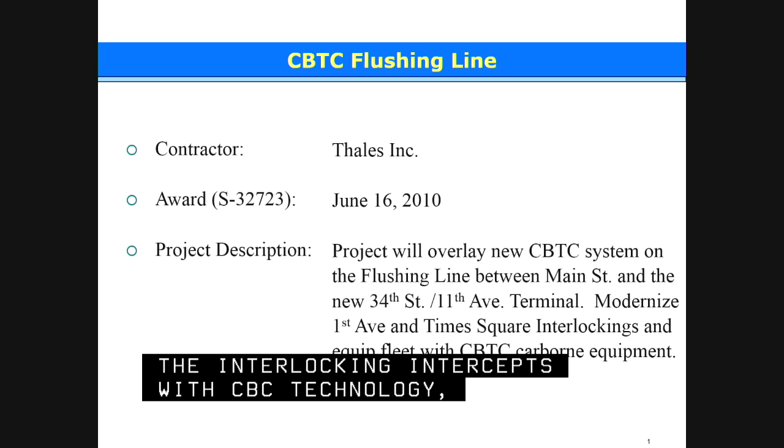The project modernized Times Square and First Avenue interlocking, modified all other interlocking to accept CBTC technology, and also installed CBTC equipment on 46 trains supplied under a separate contract with Kawasaki.

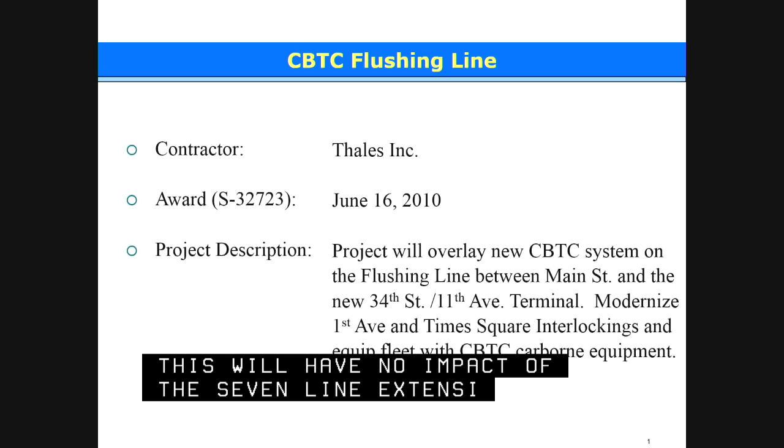This contract activity has no impact on the opening of the 7-line extension. We have also completed all the installation activity between 42nd and 34th Street to avoid any need of track outage immediately after the opening of the extension.

The project is scheduled to achieve substantial completion by the second quarter of 2017, same as I reported last time.

On the project cost, we are tracking trending cost implications associated with the revised service plan supporting the CBTC Flushing project. Service diversion costs have been trending higher due to the combination of ridership adjustment, which added Q trains and additional buses, as well as added support costs for projects allowed to piggyback the outage. We are analyzing the recent costs incurred and will report the budget impact on the next update.

Since my last update, good progress has been made. We have placed the First Avenue and the Hunter's Point interlocking in service, and we also started the CBTC functional testing.

Over the next 6 months, we will continue to install CBTC equipment on Kawasaki-supplied modified cars. These installation activities are done in-house by the Department of Car Equipment, and I'd like to take this opportunity to thank them for doing it very effectively and efficiently.

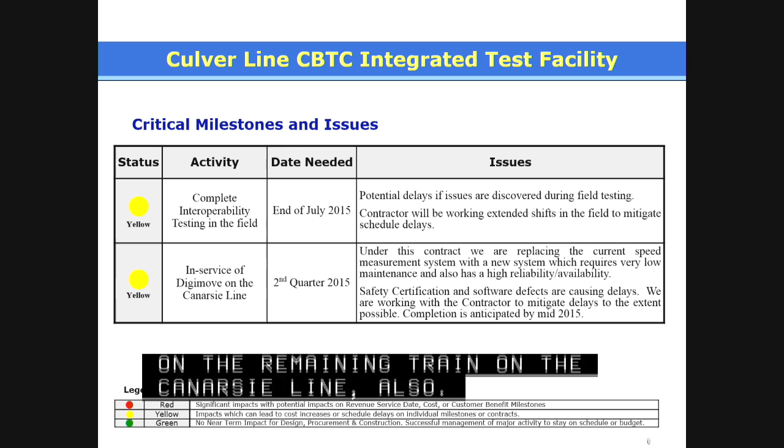Question: if you're doing this test on that express track, which trains don't normally use, between 7th Avenue and Church Avenue, and you were just talking about the 15 to 19 plan being installed from Church Avenue down to Avenue X, what happened to the 7th Avenue to Church Avenue portion, if that's where you're doing the test now?

You can still use the test track for the next 30 years, because that's the goal. But only that track, not the other. That track will be placed in revenue service. This track will remain as a test track. We're not going to place this test track into revenue.

So does that mean the return, which some politicians have called for, as well as riders, for the return of McDonald Avenue Express service cannot happen because that track is always going to be a CBTC test track?

No, Andrew. What we're describing as the test track is we've selected the one express track between the limits of 7th Avenue and Church Avenue to install the field equipment that we use to test the multiple suppliers. So what we have not done is create the entire length on all 4 tracks for CBTC utilization. It's just that one segment of the express track. So it doesn't interfere with our strategy as far as the F-line service from Queens Boulevard all the way down.

No. Again, we're very flexible. Having an express track, as far as when we use it for testing purposes, can be on nights and weekends and not interfere with any service plan that's done for the rush hour.

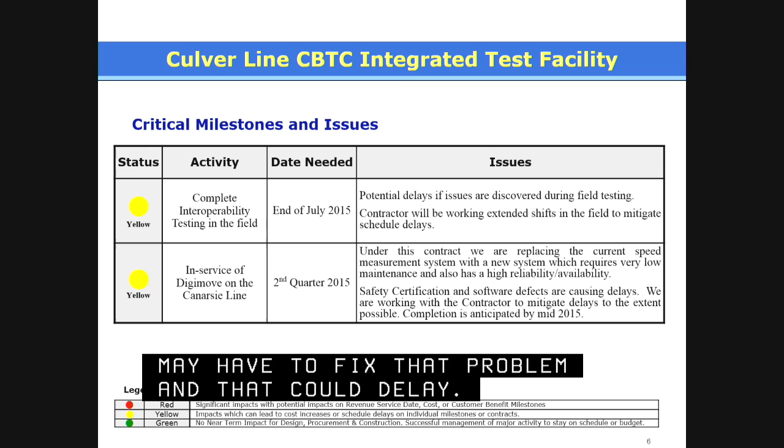For the second issue, the current goal is to place in service the new speed measurement system by June 2015. Similar thing, this is very software oriented. I want to make sure the safety is correct and the endurance is also right. And if I find any problem, which I should not, because we already corrected almost all the issues over the last 6 to 9 months, hopefully we will stay within the milestone and the schedule.

No problem. There are still some R46s running on the F line, so those aren't CBTC ready, obviously. Only the 160s would be CBTC ready. That's correct, right? That's correct.

So you're only running the 160s over the test track to gauge it? When we roll out the CBTC, it will be based on the fleet availability with the equipment installed. The R160 will be the first large fleet with the onboard equipment.

So under the QBL, we will be procuring cars going forward with the equipment on board, right? That's correct. The R211 will come equipped with it, as will the 179s. And that's the key, because you'll reap the safety benefits immediately by having the equipment on board. And we save money by ordering them as one unit, including the CBTC, rather than adding it on later. Yes, we expect to have a lower cost.

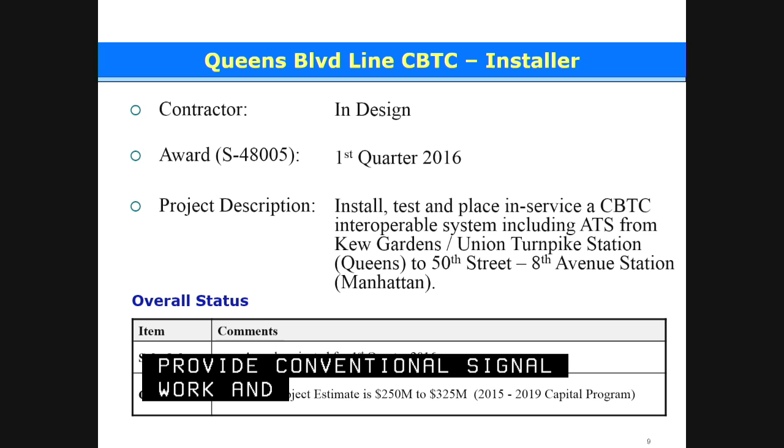Under this installation contract, a conventional signal installer will install all the CBTC equipment and support CBTC testing and in-service operation on the Queens Boulevard line. In addition, they will also provide conventional signal work and perform removal of the existing signaling system. This contract is in the design phase and is projected to award in the first quarter of 2016. And this is the money coming from the 15 to 19 program.

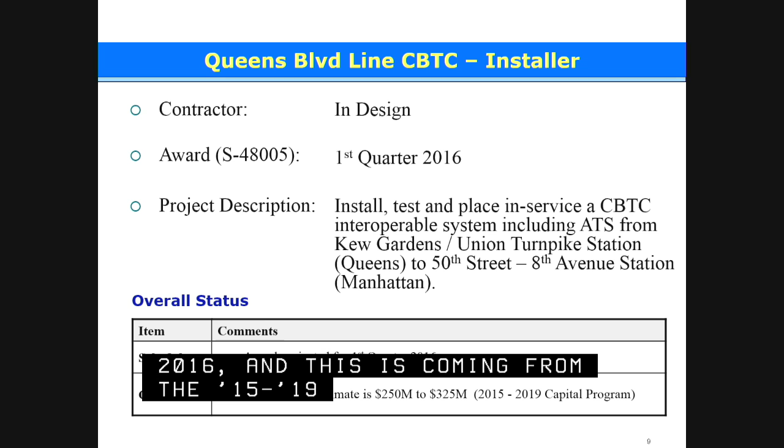This contract and the next five contracts listed here are all major state of good repair signal projects, and all these contracts are on schedule and within budget at this time. The schedule of some of the projects may get delayed because of the Sandy River tube work impacting the availability of track outage.

We have been monitoring and adjusting contract activity as required to avoid delays, and we are successful so far. Any questions? Okay. I think what's a little confusing is that he gave a presentation on the one contract for the five interlockings. Make sure that if you've got any questions on the interlockings, now's the time to bring them up. If not, we'll go to the independent engineer's review.

Good afternoon. On the CBTC Flushing Line, based on the 2015 GO schedule and the information we're aware of, we agree with the projected 2017 substantial completion date. As far as the budget, it is on schedule. We're also aware of the budget trends, so we'll look into that information as that develops. The critical highlight is an issue - again, GO availability is key to the progress, as the agency has noted.

On the Culver line, there are no issues with the schedule and budget. Again, the critical issue here is the start of the formal interoperability test, which is a field demonstration on the test track. By May we should be able to determine whether that will go forward. A delay in the start date will, of course, delay the substantial completion date.

That's all I have. And oh, I'm sorry, on the interlockings - the status of these was reported in the fourth quarter traffic light of 2014 at the March 2015 CPOC meeting. Each of these listed interlockings achieved a green status reporting, so we have no issues with those interlockings based on that status. We did not cover Church Avenue, as that one has already achieved substantial completion and it's off our list here.

In summary, I'd like to make a couple of points. Obviously, the signal program is one that is both state of good repair as well as enhanced, because it provides additional capacity. For those elements of the system we can't really lengthen platforms or lengthen trains, so we're going to have to do it with increased throughput, which can only be delivered with communication-based train control. When the program was first put together, I guess two decades ago, a decade and a half ago, the idea was to deal with individual lines that didn't interact with the entire system, and you did everything at one time - you did the cars, you did the interlockings, and you did the wayside equipment, the CBTC equipment itself.

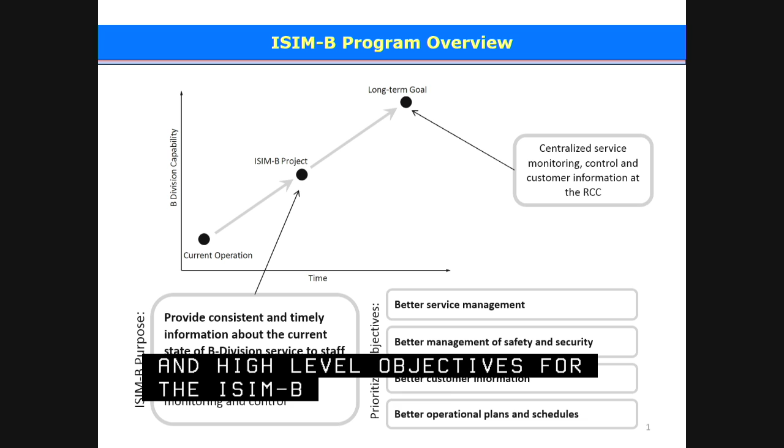Some of you may be familiar with this slide. It sets the context and identifies the purpose and high-level objectives for the ISIM-B program. The diagram shows the relationship between the ISIM-B program and the long-term goal for the B Division of centralized monitoring, control, and customer information at the Rail Control Center. ISIM-B represents an interim step that will provide consistent and timely information about the current state of B Division service to both staff and customers.

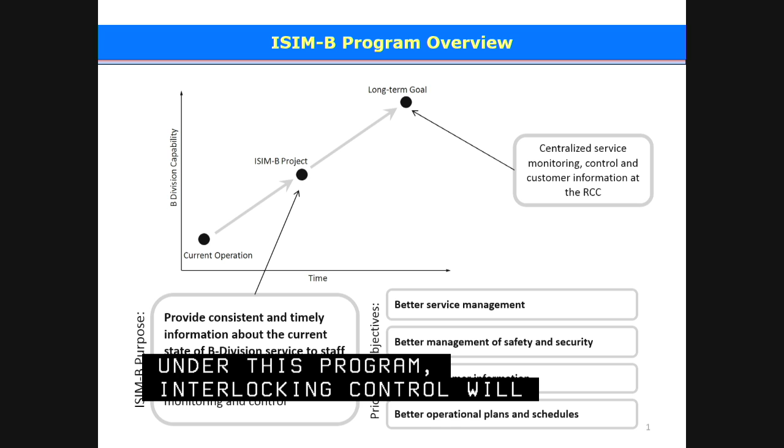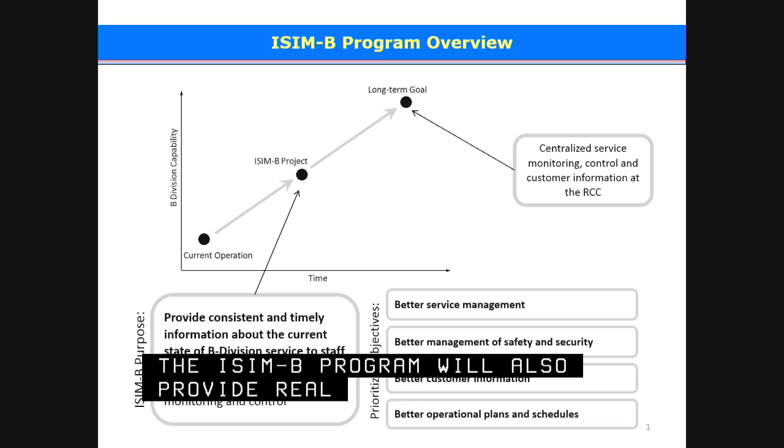In this program, interlocking control will remain in the field, but train location and identification information will be available to the Rail Control Center and field staff. The program will also provide real-time train arrival information, initially via mobile apps, and customer information signs at all passenger stations on the B Division.

Module 1 is an IFB contract. It's being advertised this week with an anticipated award in July. As part of this contract, the contractor will install PLCs at 26 field locations, and RTO operators at the Rail Control Center will be able to track and monitor all trains on the B Division. Starting at the end of December 2016, train location information will be available at the Rail Control Center for initially the first 18 towers. And since some of these master towers are part of signal modernization projects, 8 master towers will be available sometime in mid-2017. This project is slated for substantial completion at the end of 2017.

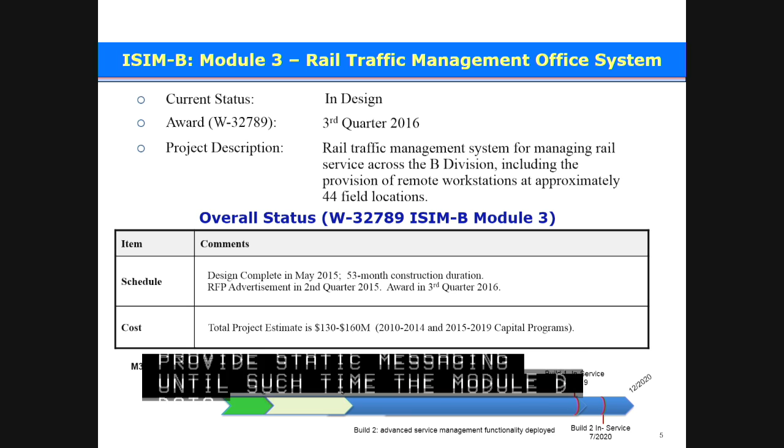Module 4 will provide station infrastructure to deploy system-wide public address customer information screens to the remaining B Division stations that are not part of any ongoing capital contracts. Initially, the system will provide the data to mobile apps, and as stations are built, this information will become available to the signs at each of the passenger stations. This module is currently in the planning phase.

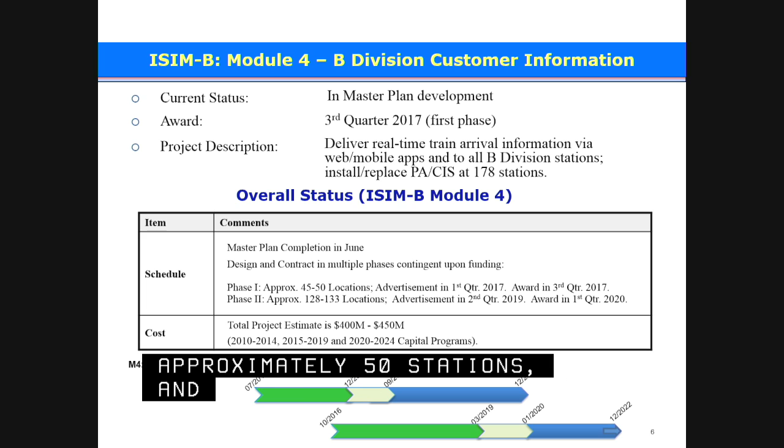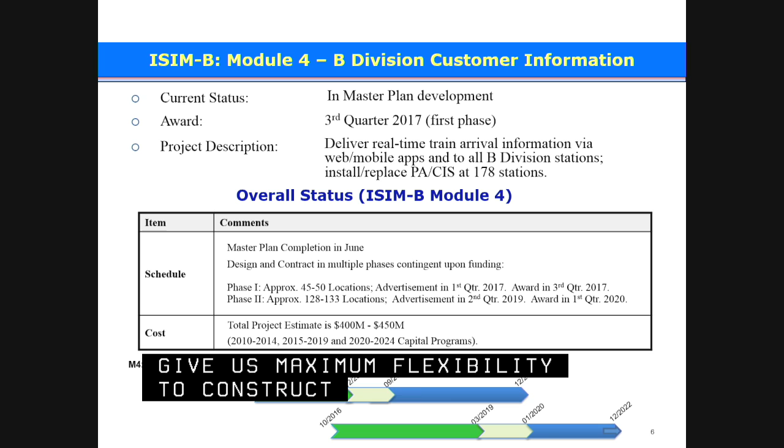Right now we anticipate Phase 1 to design and construct approximately 50 stations, and the Phase 2 part of the project will design and construct the remaining 128. The funds to design all of the remaining stations are currently available, and we are proceeding with these designs to give us maximum flexibility to construct as many stations as we have funds for. We will also be leveraging new technology where possible as we roll out our designs.

Previously, the board had requested us to identify ways to advance countdown clocks on the B division. The Interim Train Arrival initiative is an attempt to do that while we're implementing the office system being developed as part of Module 3.

There are currently 3 lines on the B division, Concourse, West End, and Sea Beach, that have modernized signaling for which the data already resides at the Rail Control Center.

So by extending 2 existing New York City Transit systems, we'll be able to undertake 2 parallel efforts. One will be accomplished by our in-house software development team, and the other will be done via a task to our ATS maintenance contractor.

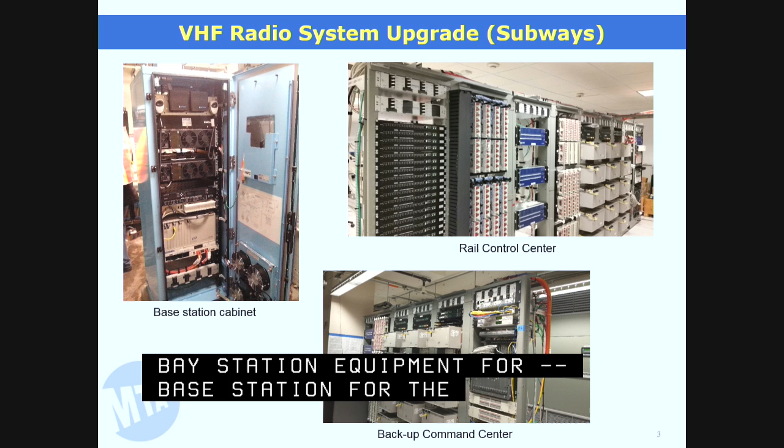What you see here are 3 photographs of the type of equipment we've installed. The photograph on the left is radio base station cabinet equipment, which goes in the field locations and contains all the radio base station equipment for the field. The larger photograph on the top right is the equipment installed at the Rail Control Center, and the bottom photograph shows the equipment installed at our Backup Command Center.

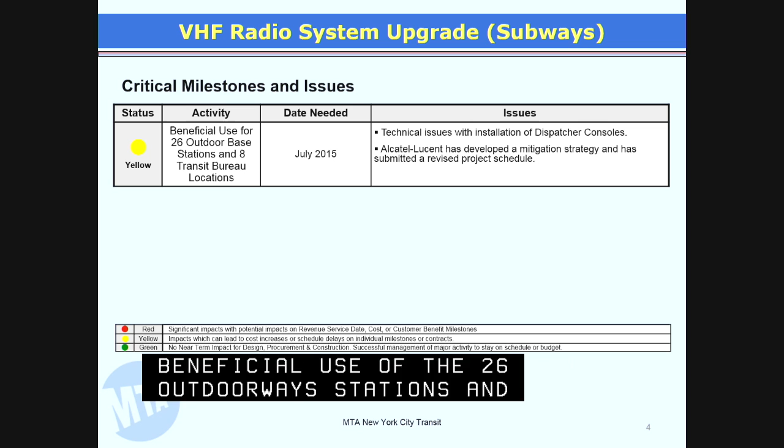We have a milestone for beneficial use of the 26 outdoor base stations and 8 transit bureau locations. We've had some technical issues related to the installation of dispatcher consoles at these locations. That issue has been resolved, and we've worked out a plan together with our operations and maintenance people.

The contractor has submitted a mitigation schedule, which requires the cutover of 2 base stations a week. I'm pleased to report that since we received the schedule 3 weeks ago, they've actually cut over the 6 required base stations. So far, the mitigation schedule is being implemented and is working.

The next projects I'd like to talk about are related, a new radio system for bus operations for New York City Transit as well as MTA Bus. The first project is the Bus Command Center, under which we'll design and build a new modern secure bus command center for both New York City Transit and MTA Bus operations.

Outfitting that project will be the second contract, the Bus Radio System Project, which will install the new radio system for communications between all of the buses as well as the command center.

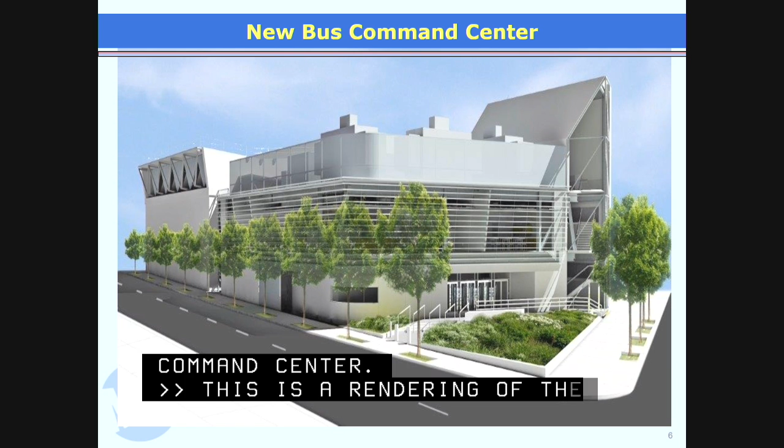This is a rendering of the new Bus Command Center to be located in East New York, across the street from our existing East New York bus facility.

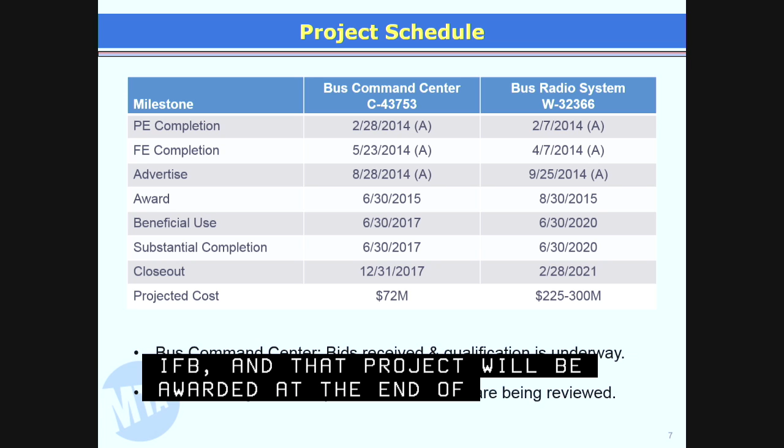You see here the project schedules for both projects. The Bus Command Center is an IFB, and that project will be awarded at the end of June. The radio system project is an RFP, and we're currently reviewing proposals. Since both projects are in the procurement phase, I can't give any more procurement details.

IEC project review summary, please. The IEC will comment on the VHF radio project only. NYCT correctly states the project status and issues. There are no budget issues.

The delay is in part attributable to a ramp-up of work leading up to the site cutovers and the actual steps involved in switching over to the new equipment. There has been an improvement in the process.

This improvement has been mentioned by Mark in the cutovers at this point. Much of the work in place for increasing the cutover rate and achieving BU for outdoor sites is in place, so July 2015 is not out of the question. But based on progress to date, the IEC believes there will be a delay of 1 month to this substantial completion date.

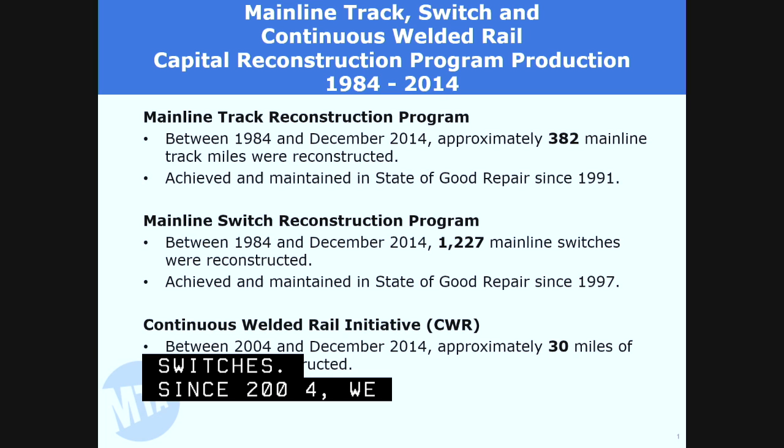Since 2004, we have reconstructed 30 miles of continuous welded rail. Production levels in the 2010 to 2014 Capital Track Program include 56 miles of mainline track, 126 mainline switches, 3 miles of yard track, 29 yard switches, and 8 miles of CWR.

As part of the first quarter of 2015, we have essentially completed the 2010 to 2014 program with the exception of 8 mainline switches, which will be completed later this year.

The scope for the yard track program was increased slightly, resulting from track identified as reaching its useful life in 3 yard car washes. This work will be done in coordination with a planned car wash rehab project. Funds were reallocated from the yard switch program to address the increase. The 2010 to 2014 capital program will achieve substantial completion in December 2015.

In an effort to reduce administrative support costs and better coordinate with other planned capital work, we have expanded the track program from an annual program to 2- and 3-year programs, i.e., 2015 to 2016 will be one program.

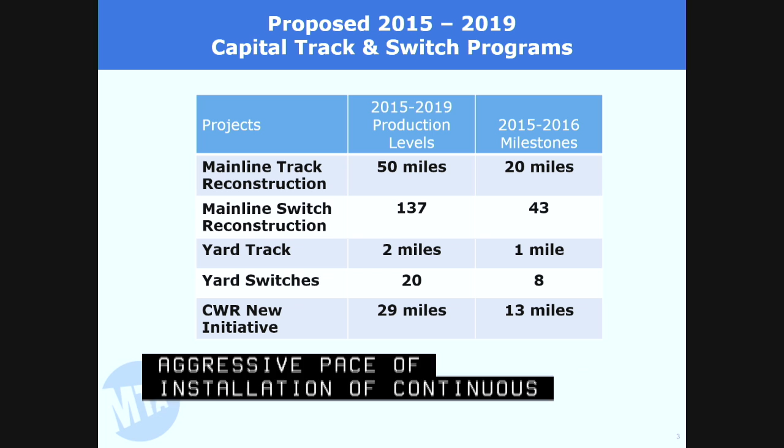And 2017 to 2019 will be the other. Using the condition survey and track access data currently available, the 2015 to 2016 milestone goals have been planned as indicated on this chart. The 2017 to 2019 milestone goals are being planned in coordination with other construction and consideration of track access. The program includes an aggressive pace of installation of continuous welded rails, front-loaded into the first 2 years of the capital program.

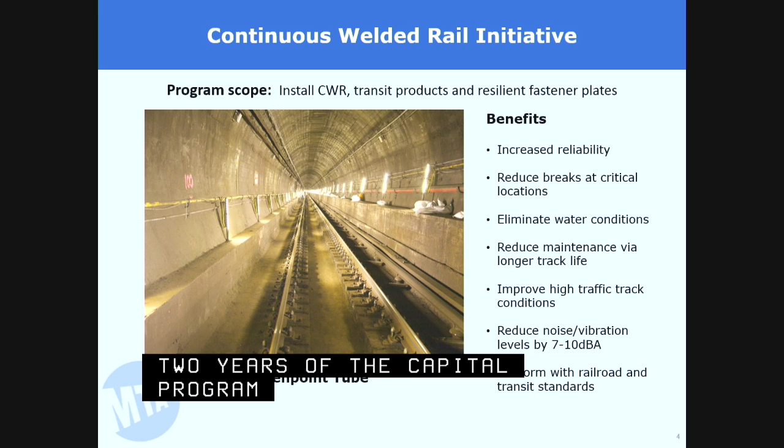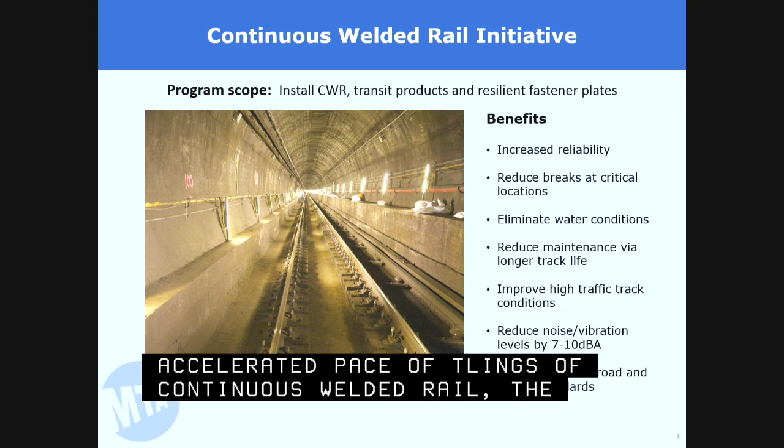Track engineering has identified 5 corridors of concern that require an accelerated pace of installation of continuous welded rail. The benefits from this program include increased reliability, elimination of water conditions, track life, reduced noise, and vibrations.

In 2015 and 2016, a significant amount of continuous welded rail work is planned in the 8th Avenue and Queens Boulevard corridors. These two corridors have high ridership and the highest million gross tonnage of revenue service.

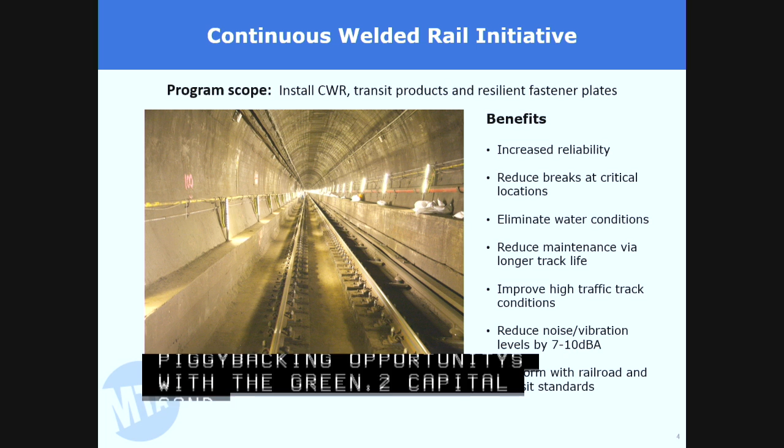This picture depicts CWR and scheduled component renewal work that was completed by in-house forces in the Greenpoint Tube to take advantage of piggybacking opportunities with the Greenpoint Tube Sandy Capital Project. This is another example of the coordination effort by our in-house track program, which increases productivity through shared track access, minimizing support costs and customer impact.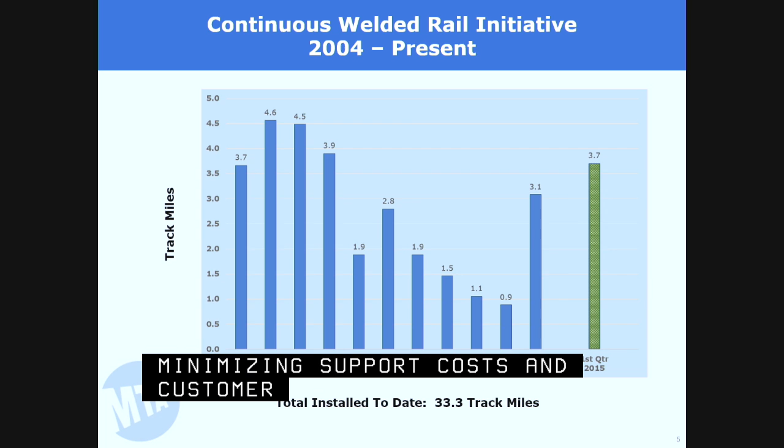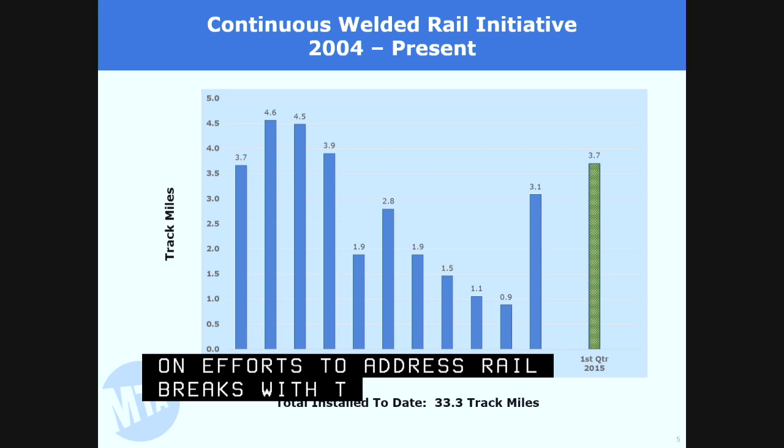To more clearly elaborate on our efforts to address rail breaks with the installation of CWR, this chart illustrates the amount of track miles where CWR has been installed over the past 10 years. Whereas in past programs, we have averaged approximately 3 track miles per year.

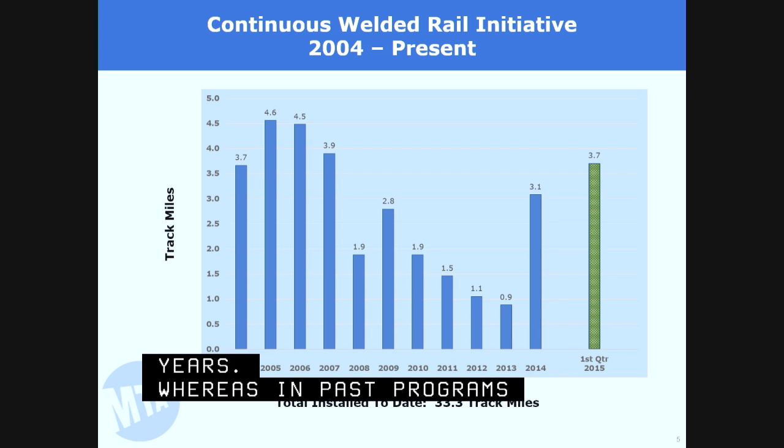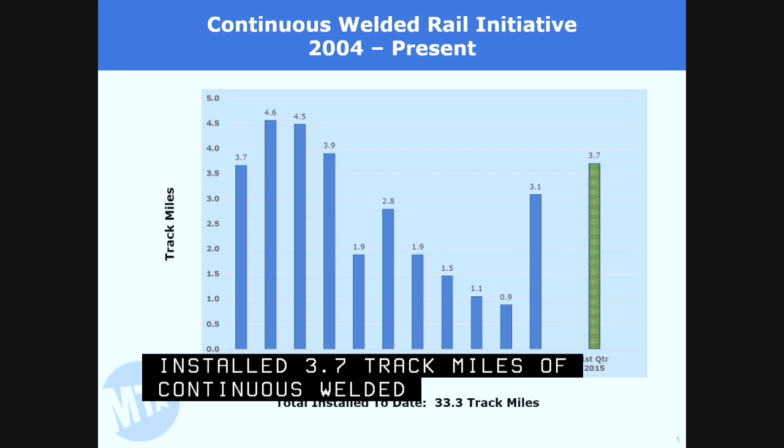Note, in the first quarter of 2015, we have already installed 3.7 track miles of continuous welded rail. Since 2004, we have installed approximately 33 track miles of CWR.

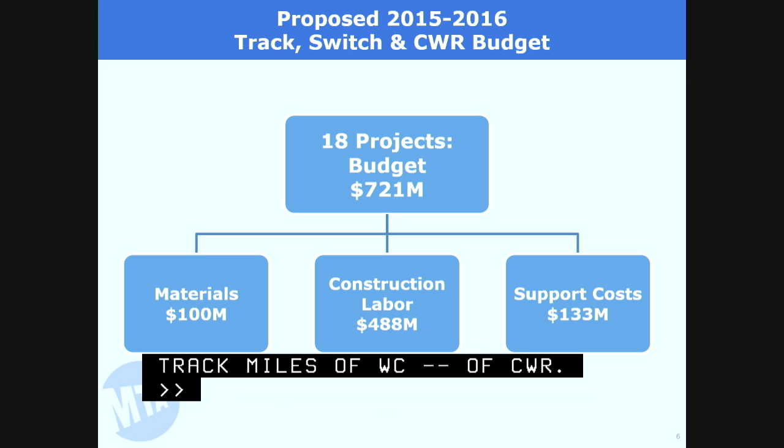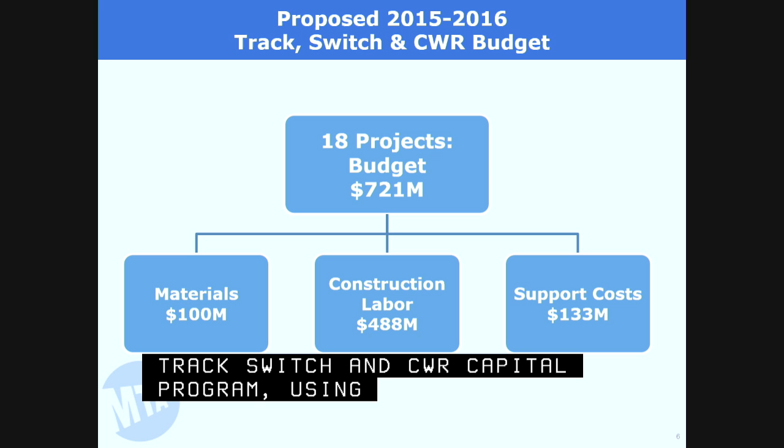In 2015 to 2016, the mainline track program and CWR program includes 18 projects budgeted at $721 million. We are currently in the process of finalizing the milestones for the 2017 to 2019 track, switch, and CWR capital program using the results of the condition surveys and in consideration of track access opportunities.

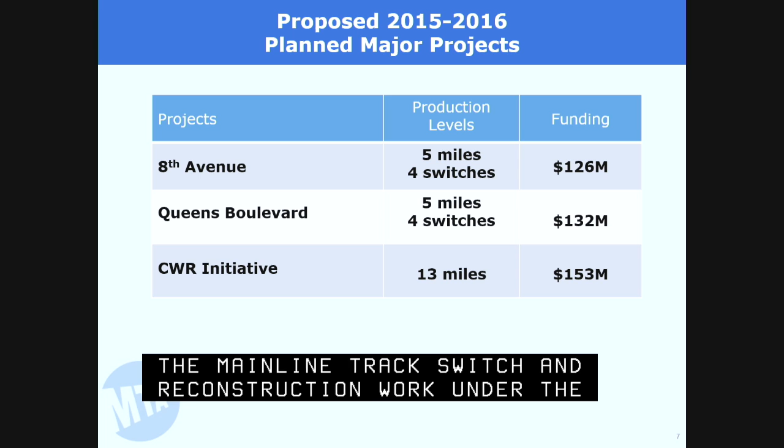Of the 18 projects planned in 2015 to 2016, the largest projects are on the 8th Avenue and Queens Boulevard corridors. The funding allocation of mainline track and switch reconstruction work under the two projects includes approximately $126 million for the 8th Avenue line and approximately $132 million for the Queens Boulevard line.

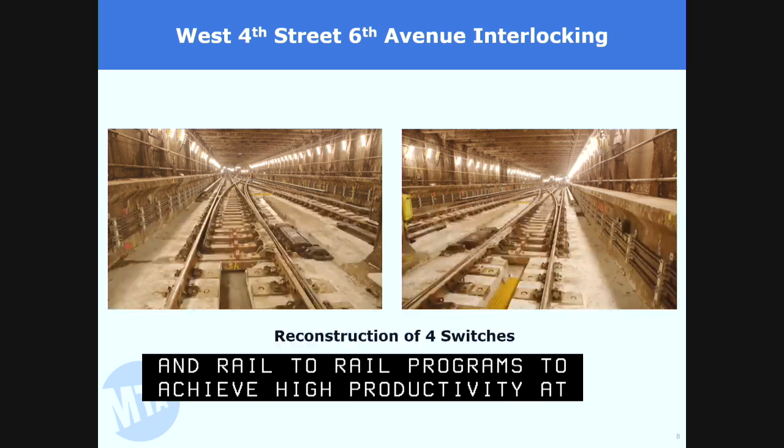David, when you say the 8th Avenue line, what are the limits? The corridor runs roughly from Chambers Street all the way up to 207th Street, and Queens Boulevard out to 179th Street.

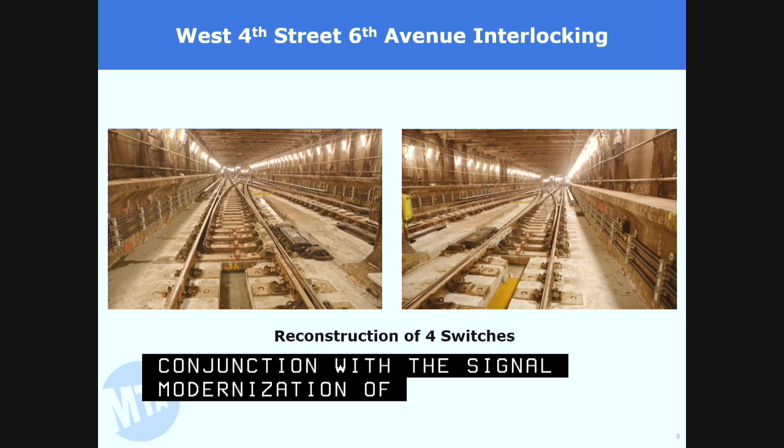This slide illustrates the reconstruction of 4 switches, referred to as a diamond crossover, located north of West 4th Street on the 6th Avenue line between tracks B3 and B4, completed the weekend of March 21st, 2015. This work was done in conjunction with the signal modernization of the West 4th Street and 6th Avenue interlocking project, as earlier presented by Nadish Patel. This is another demonstration of the efficiencies of having an in-house track and switch capital program that can be flexible and work with other projects.

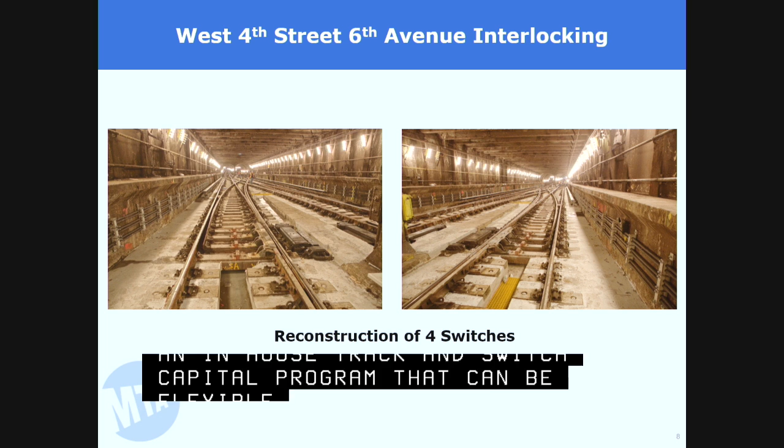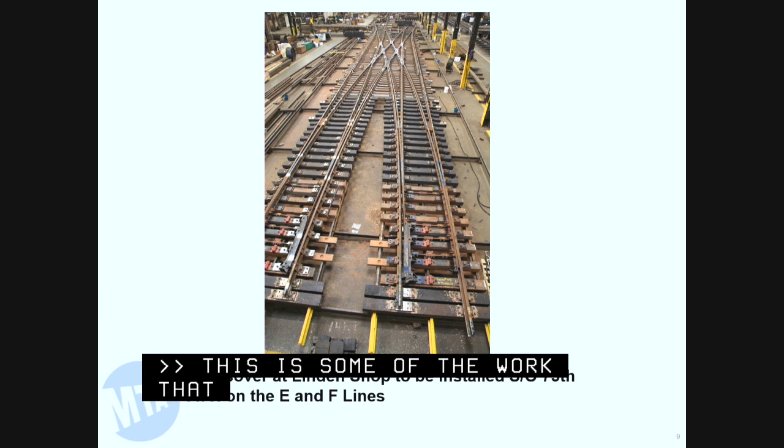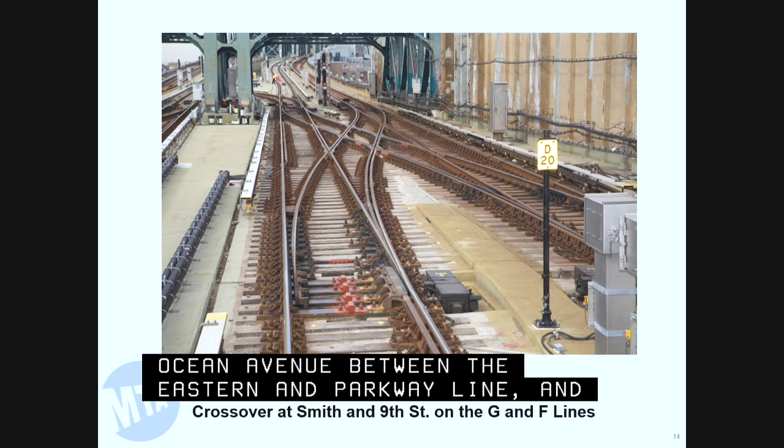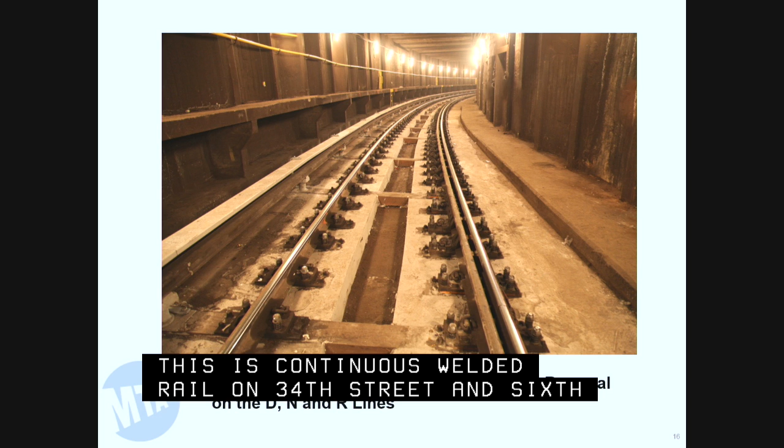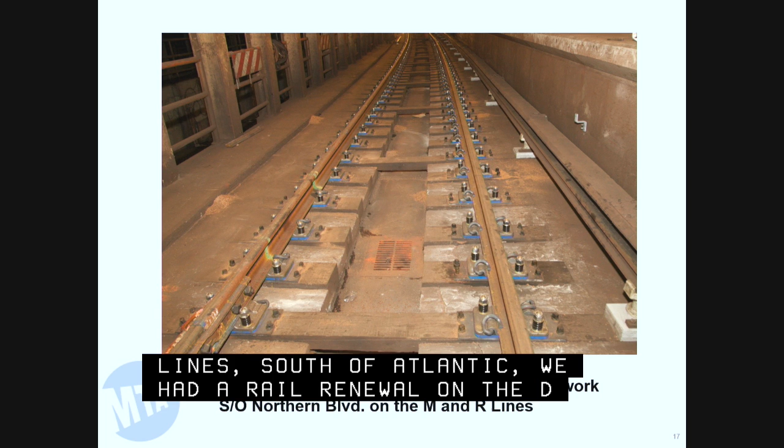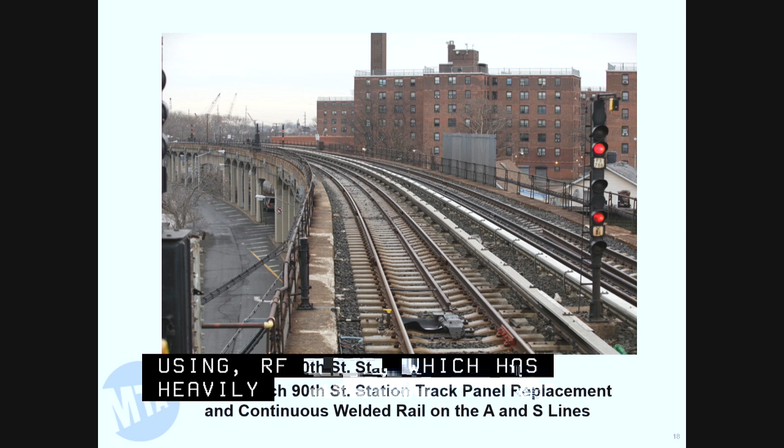They're showing continuous welded rail with the new type of plate that we're using. The RF plate has heavy resiliency. And at 90th Street, on track panel replacement, we've installed concrete ties and continuous welded rail out on the A line.

And that concludes my presentation.

Well, you saw in the presentation the pictures of what was built out at Linden. They build the entire crossover in place, and then you cut it off into sections, and then you ship it out on flatbed by way of the rail system. On the underground you have to do it that way, right? Correct. But if it's an elevated structure, they can take it out and then hoist it into place.

The Ekki tie blocks, those are African wood, right? It's a very hard wood. And how much of that have we put in the system? Couldn't tell you off hand.

Not that much, Tom. But we still put in testing on a small scale of what generally goes with a track structure underground. Even though you've got that type 2 construction with a good concrete invert to carry the water away, you still get rotted wood ties. So I think they're trying with the Ekki ties to see if they can get longer tie life out of the ties. But you see the level of quality of the construction, it's really pretty good, and they do an excellent job.

The other crossovers you saw were replaced in kind in place, right? The ones on the IRT? That's correct. What's your total workforce in terms of number of employees? About 600 personnel in track construction.

And you've got midweek RDOs, and you work nights for the most part, right? That's correct. So those are productivity issues that we're trying to get at the other 2 rail agencies, but you have to work through collective bargaining agreements to do it.